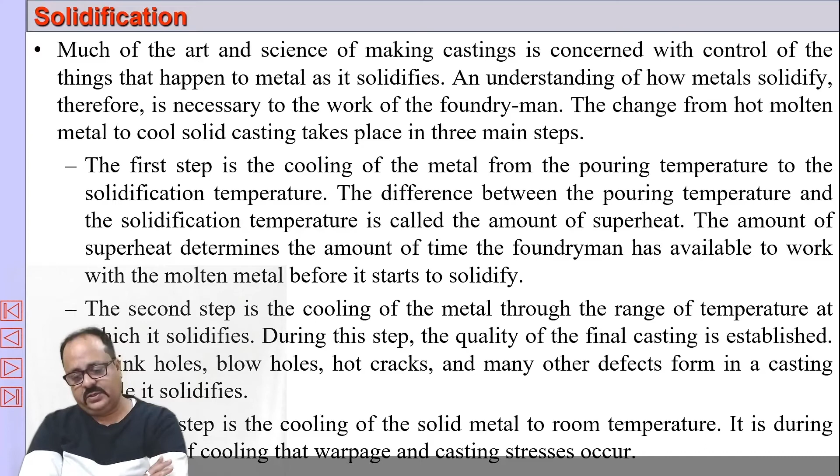So the change from hot molten metal to a cool solid casting takes place in three main steps. In the first step, the cooling of the metal from the pouring temperature to the solidification temperature occurs - from this temperature to the solidification temperature, and this much time is what the foundryman has to fill the mold cavity.

Within this time, this is called the superheat. This temperature difference is called the superheat - this is the freezing temperature and this is the temperature of the molten metal. So this temperature difference is called the superheat, and this much amount of time the foundryman has to fill the mold cavity.

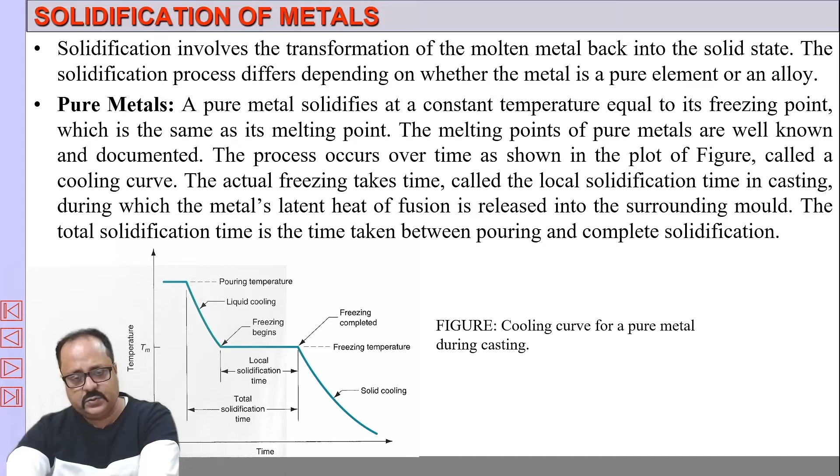The second step is the cooling of the metal through a range of temperature. At constant temperature it will solidify and freezing starts, and this stage is basically liquid plus solid, and then this is solid. So at this stage, at constant temperature, we are discussing pure metals here - for pure metals it will solidify at constant temperature.

It is somewhat like this, and after this it will cool down slowly. This is the solid area, this is solid plus liquid, this is liquid. And if we plot the density and time curve here, you can see the density is increasing - this is the liquid shrinkage and this is solid shrinkage, and this is compensated by the riser.

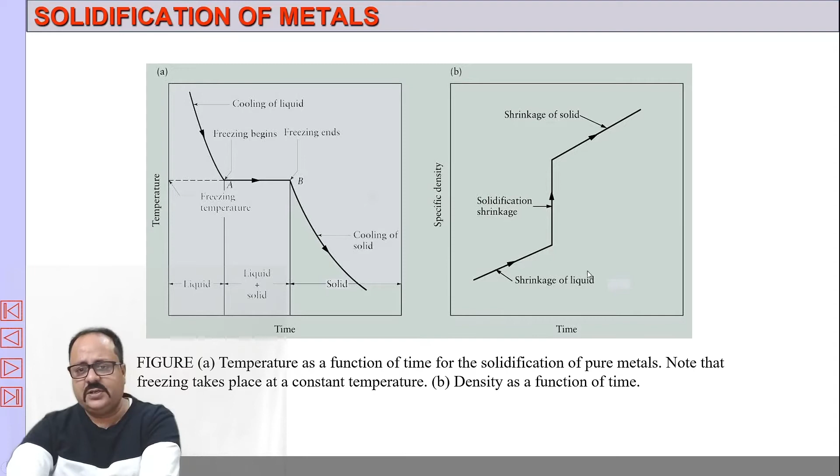So what happens during solidification? As the metal is poured, heat transfer takes place through the mold wall, and a thin skin is formed on the casting. Gradually grain growth will take place, and the grains are randomly oriented initially, and as directional solidification starts, the growth takes place towards the direction of solidification, and therefore a columnar structure is obtained on the inner side, and this continues to grow.

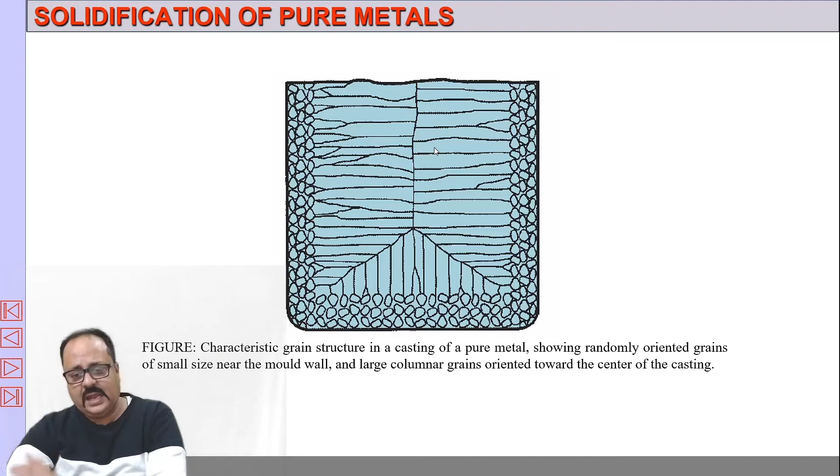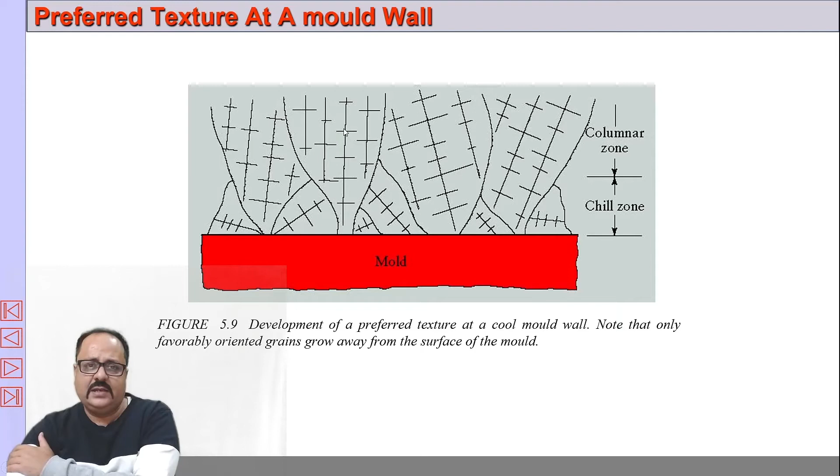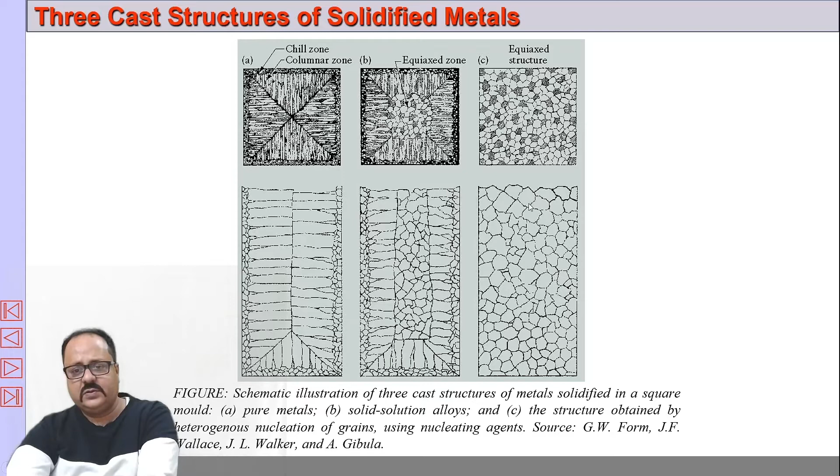It forms like a needle - this is called dendritic structure. So it will grow like a needle, and this needle will grow branches, and it is called dendritic structure. So this is the skin, and this is the columnar structure of the grains, and this is for alloyed metal - this is equiaxed structure, and I'll show you.

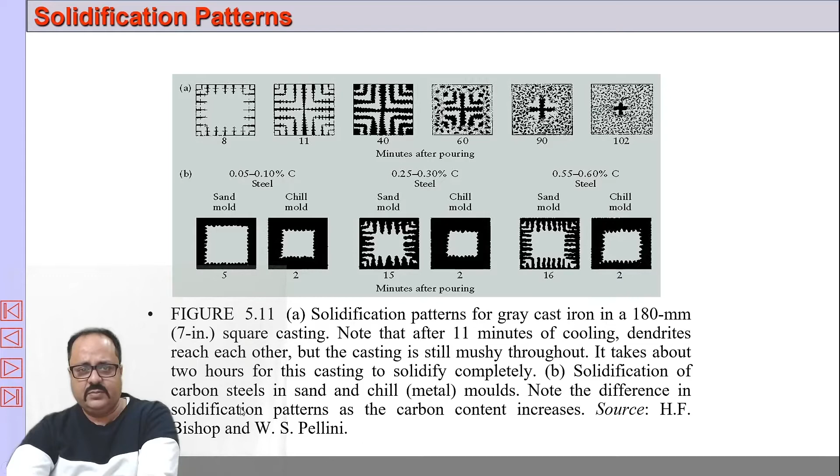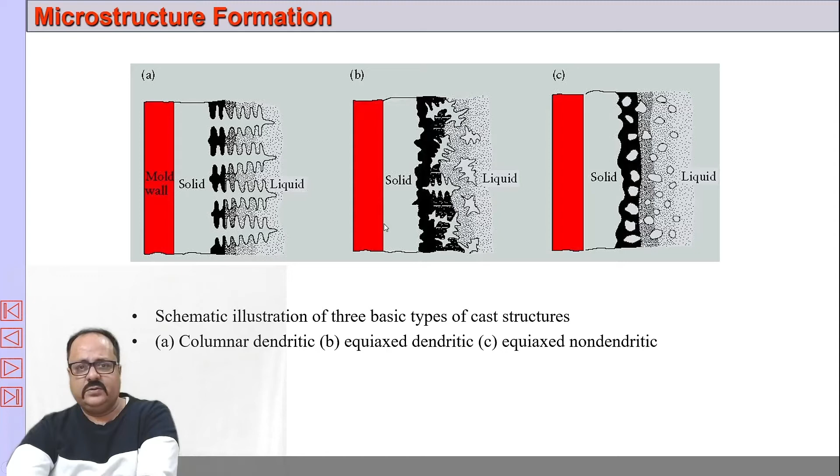So this is a particular experiment - after 8 minutes, after 11, 40, 60, 90, 102 minutes. So what happens? A is for grey cast iron in a 180 mm square casting, and B is for carbon steel. See how they are differently solidifying, and you can see this is the dendritic growth, this is the mold wall. So the thin skin is formed and gradually it starts to solidify inside.

Now, a very important formula that we are going to discuss is called Chvorinov's rule. Now, it is very important for us to know how much time it takes to solidify.

Chvorinov did several experiments, and he came up with a formula that the total solidification time is equal to a constant C, which is called a mold constant, multiplied by the volume of the casting divided by the surface area of the casting, raised to an exponent n. It is normally raised to the n, and n is normally taken as 2.

So TST is the solidification time, V is the volume of the casting, A is the surface area of the casting, and n is taken as 2. So I have directly written here 2, and Cm or C is the mold constant.

We can find out the value of the mold constant by various experiments, by actually casting and solidifying, calculating the solidification time.

Now this formula is very important for us to design the casting. Why? Because the solidification time is dependent on the volume of the casting to the surface area, and if I can increase this ratio, that is the volume by surface area ratio, then my solidification time will increase. This is very important for designing the casting, gating system, and also the riser. So we'll design the riser in such a way that solidification time is more.

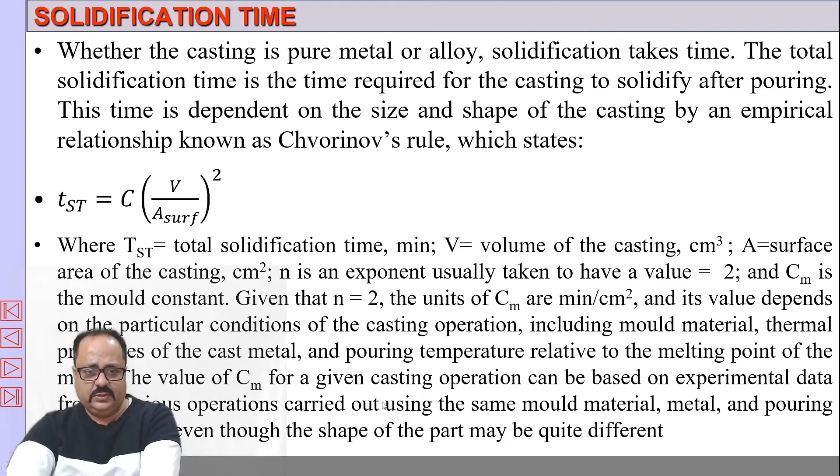Okay, so based on this formula, let us solve a particular problem. In this problem, there is a steel casting which is a flat plate. The mold constant C is 4 minutes per centimeter square.

This we know from our previous experience. And the casting is shown in the figure, whose length is 30 centimeters and width is 10 centimeters, and the thickness is 20 mm.

So how long will it take for the casting to solidify? The area will be 2 into length into h, plus 2 into w into h, plus 2 into w into l, and the volume will be L into H into W.

The area is coming out to be 760 centimeters square. We first calculate the area, then we calculate the volume. The volume is 600, so V by A will be 600 by 760, and C is given to us as 4, so it comes out to be 2.49 minutes for this casting to solidify.

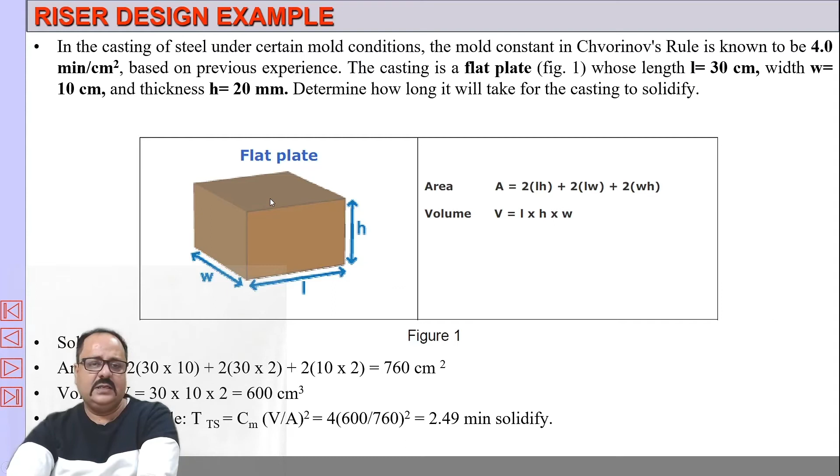If we discuss one more problem here, it is a cylindrical part, figure 2, and the radius of the cylinder is 250 mm and its thickness is 20 mm. The mold constant is 2 seconds per mm square. How long will it take to solidify?

So the area will be this area, the surface area will be 2 pi r square, and the circumference into h. 2 pi r, or pi d is circumference, into h, will be the surface area of this side.

Now this area is on the top and on the bottom, so it will be twice... okay, volume will be pi r square h. So sorry, not twice pi r. Pi r square is the area of this surface, and 2 times it is, therefore it is twice pi r. Pi d square by 4, had it been pi d square by 4, it would be into 2, so pi d square by 2.

So this cross sectional area, the surface area, will be this value, 424115, and the volume is 3926991 mm cube. The mold constant is given to us, so the time taken will be calculated like this, which comes out to be 2.86 minutes.

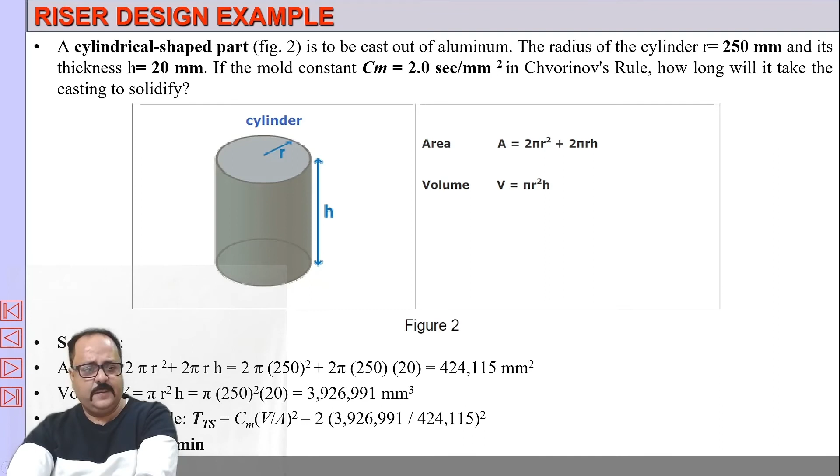Very simple problem. So like that we can use Chvorinov's rule to calculate the time taken. So this is another problem.

In this problem, it takes 155 seconds for a cube to solidify. The cube has a 50 mm side. Now you have to find out the Cm. Also, if the same alloy and mold is used, find the solidification time for a cylindrical casting.

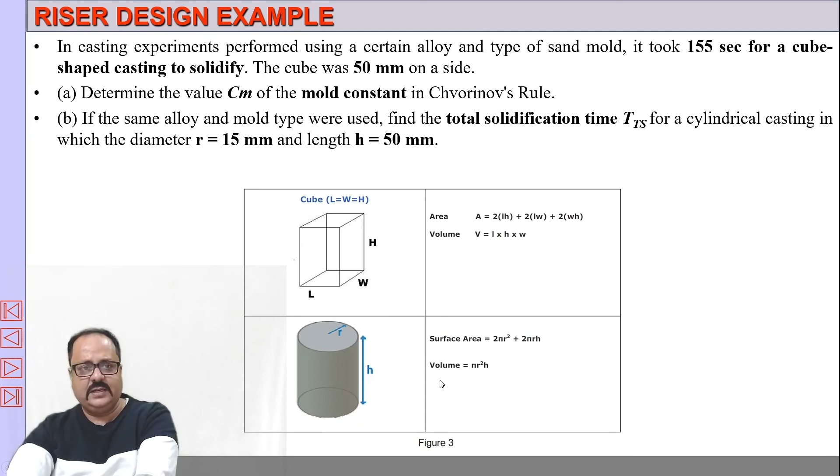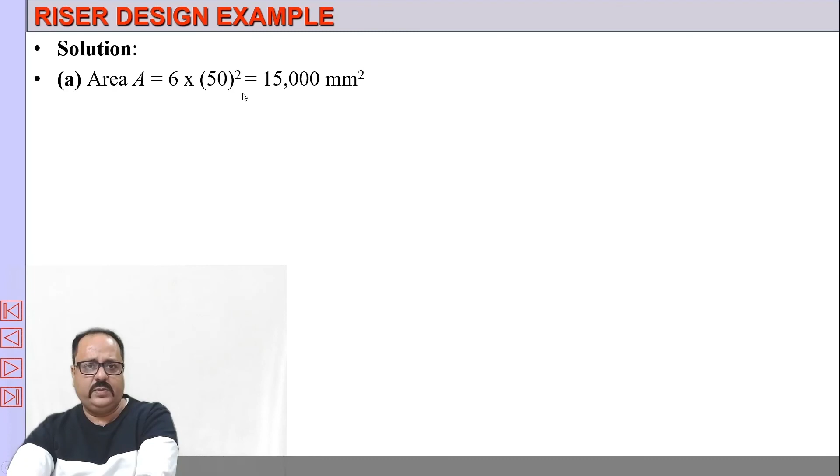For the cube and the cylindrical casting, we know the surface area formulas for both. So we can do it like this. The surface area of the cube will be this, and the volume of the cube will be this, so V by A will be this.

It takes 155 seconds, so 155 divided by this squared will give you the mold constant, which is 2.232. Since we are using the same mold, this will be applied in the next part of the problem.

For the next part of the problem, we know this, so we calculate the surface area, which comes out to be 6126, and the volume comes out to be 35,343 mm cube.

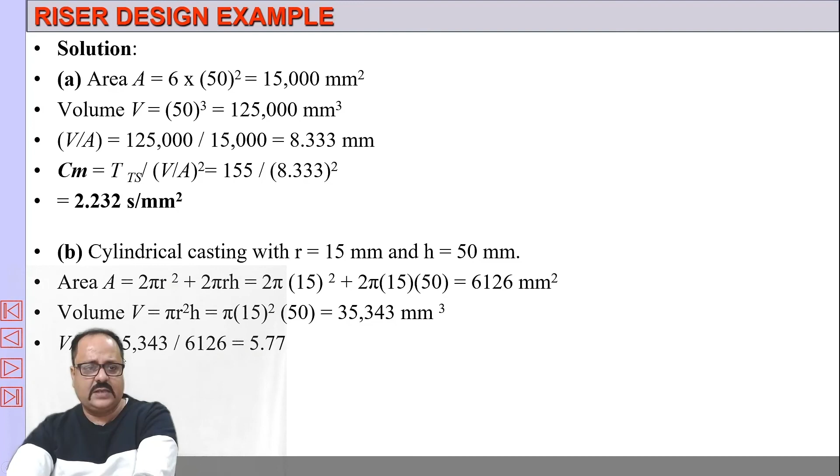So we know this mold constant, so V by A whole squared into this will give me the time taken. So the time taken to solidify is 1.24 minutes.

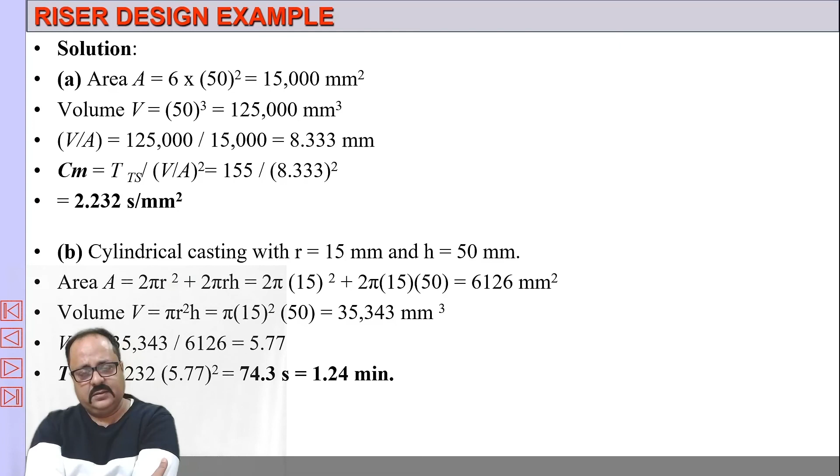So I hope the solidification problems are clear to you. In my next lecture, we'll be discussing the design of risers in sand casting. Thank you all for watching this video.